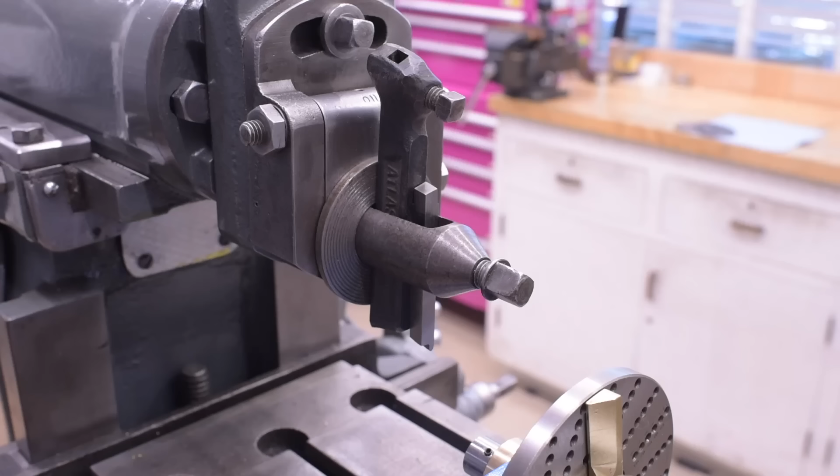You're probably looking at that and thinking, wow, that is the jankiest shaper tool holding setup ever. Excuse me, I'll have you know it was nominated for, but did not win, the 2025 Jankies. Therefore, it is no better than second jankiest in the world. I mean, it did win a 2024 Golden Jank Award, but nobody cares about those.

I've got a tool build for you this week. I'm soon going to be in need of some sort of rotational indexing or dividing fixture for my shaper. I've got a bunch of projects lined up where that would really be helpful, so I'm going to see if I can come up with something right now.

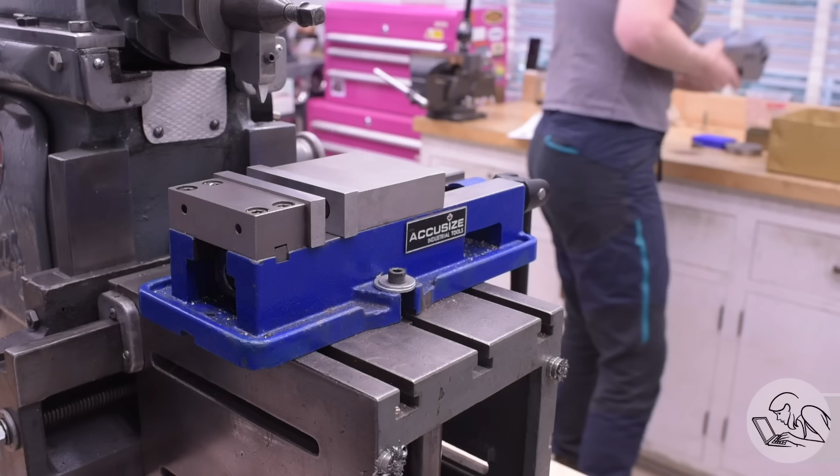I started by trying to find some existing fixture I might have that could be used for rotary indexing on the shaper. I do have my 6-inch Vertex rotary table, but as you can see, it is comically oversized for this machine. To understand my design decisions here, you have to understand how small this shaper actually is. My 4-inch rotary table is a pretty decent fit. However, by the time you get a chuck and everything on there, the entire work envelope is consumed by this setup. So again, not even close to working.

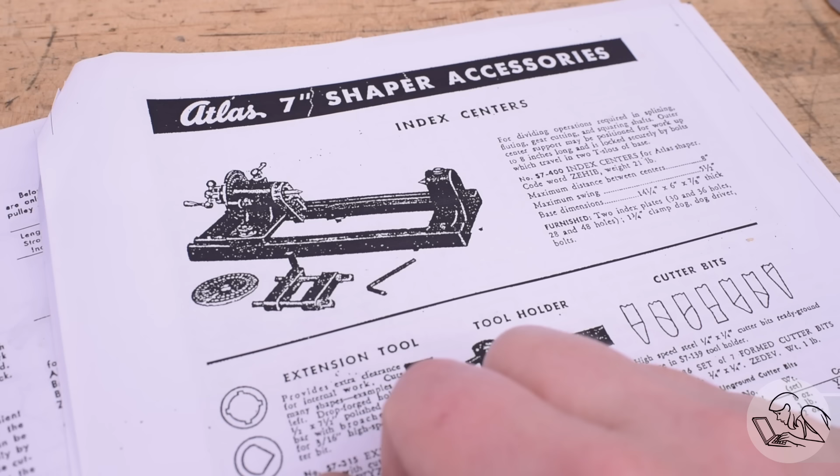Atlas actually did have their own design for this type of thing. It used 2 centers on a common frame, with little indexing plates and a little drive dog clamp thingamajig. It's actually quite a nice design. I did look into acquiring one of these. Unfortunately, not very many were sold, so they are pretty unobtainium nowadays.

I also considered copying this design. It has a lot going for it. Obviously, centers give you guaranteed concentricity on your work. The usual downside to working between centers on something like a mill or a shaper is that you have a separate footstock with one center and your work holding on the other, and you have to get those 2 centers perfectly aligned on the table before you start.

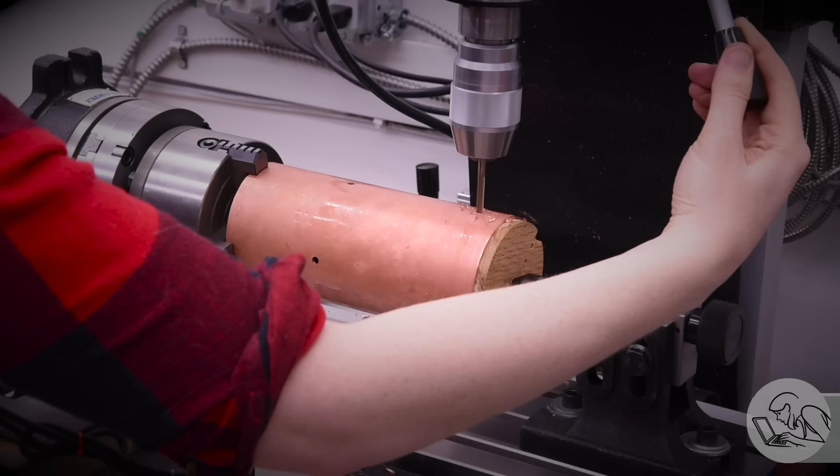You've seen me do this in some setups on my mill for rotary operation, and it's a lot of work. It can take an hour or more to get those 2 centers properly aligned. There's a lot of variables in all 3 dimensions, and every adjustment affects every other adjustment. Now, what's clever about the Atlas design is that they've put both centers in the same fixed casting, so you don't have to align them. You just put that whole casting right on the table, and you're ready to go. And I really like that.

Unfortunately, the challenge for me with this would be manufacture. Those 2 centers in that common casting are quite far apart and not very large in diameter. So really what you'd want to do is line bore that to guarantee alignment of the bores, but because of the small diameter, it's not big enough to do a line boring operation. I don't know how they made these in the factory. My guess is they probably had some sort of specialized machine that bored both ends of it at the same time. I can think of a few possible ways one might make this in a home shop.

But honestly, it's not really necessary. I think I can sidestep this whole thing because I don't need to work between 2 distant centers like this. All of the parts I want to make with this are disc-shaped. I'm talking about gears and ratchet wheels and knurled knobs and that type of thing, so I don't need to work between centers. I just need some sort of shallow work holding system at one end.

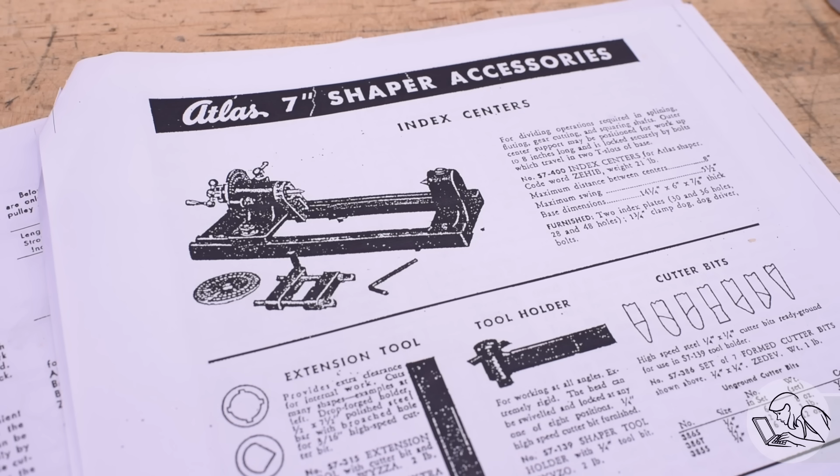The next question is how to do the actual indexing. My Vertex rotary table comes with indexing plates and the sector arms and the little crank handle and so on, all the pieces necessary to index with the rotary table, so this was appealing if I could somehow reuse these parts.

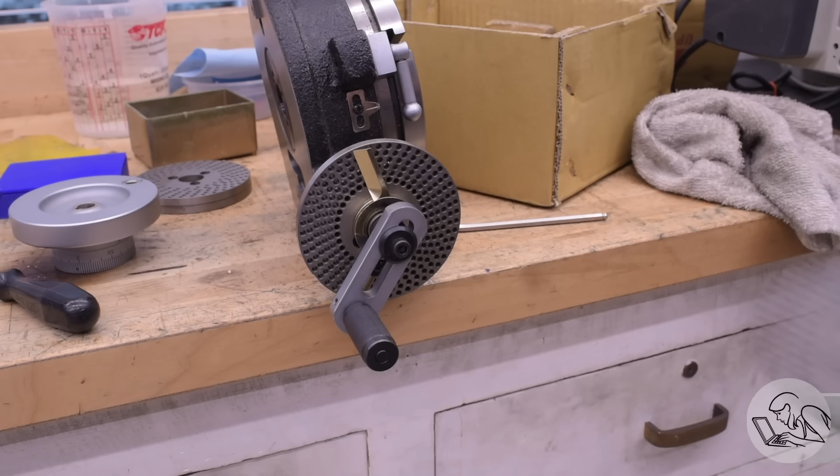The other thing I did consider was using the change gears on my lathe as indexing plates. This is something model engineers have been doing for 100 years. Your lathe came with a whole bunch of gears, so you have a whole bunch of tooth counts and all of the factors and multiples of those tooth counts that can be used for indexing. So a lot of times model engineers will set up an indexing fixture on the back of the spindle of their lathe, something like that, to index with these gears.

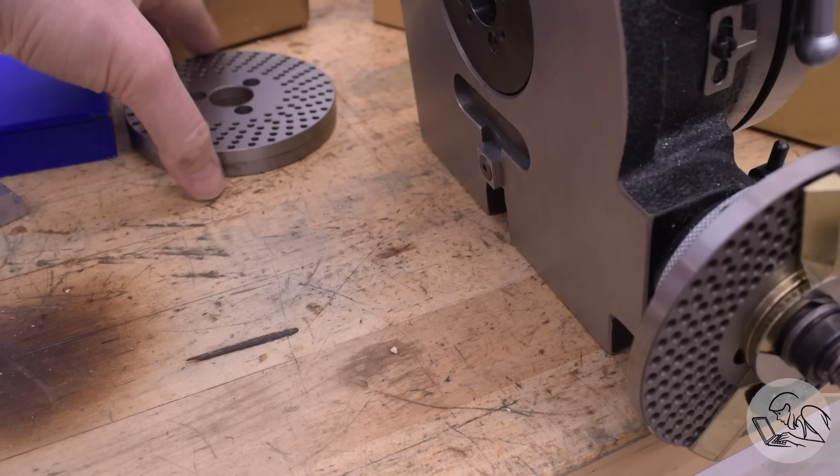Now, the nice thing about indexing plates is they're all the same size. If you use change gears for indexing, well, they vary dramatically in size depending on tooth count, so your indexing fixture has to somehow accommodate that, which adds a lot of complexity.

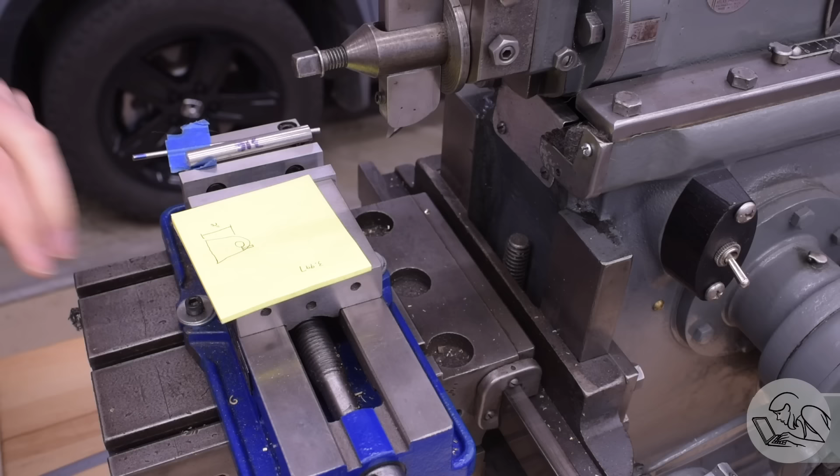The next challenge is whatever I build has to be very compact. It may not be easy to appreciate on video how small this shaper actually is. The work envelope is about the size of two fists, so whatever I build has to fit in that.

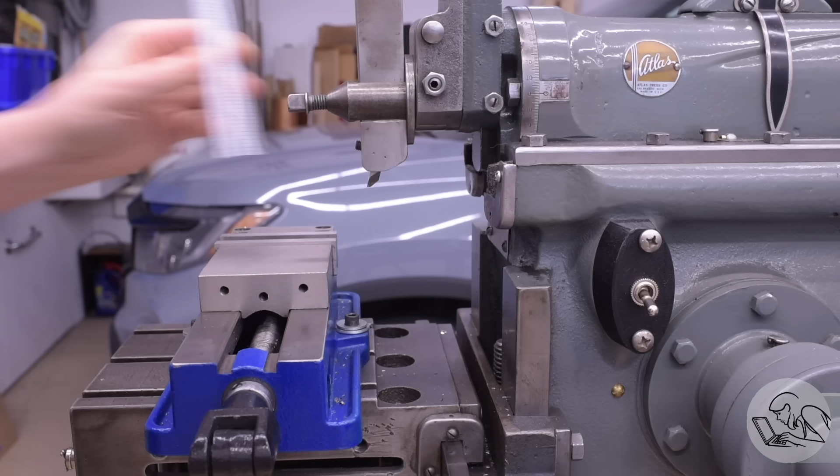I also brought out a couple of samples of the range of mandrels that I would want to work with for work holding. That gives me a sense of how big some of the components need to be. I set the center of the fixture at 2 inches, which is half the Z capacity of the machine, which should give me the most possible working range for different diameters of parts.

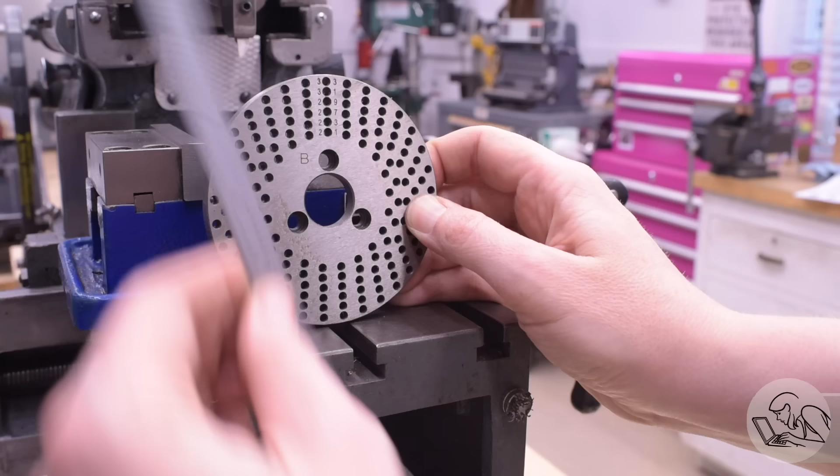And extremely luckily, that is just enough to get these Vertex indexing plates off of the table, so they can fit on a 2-inch center without touching the table, just barely.

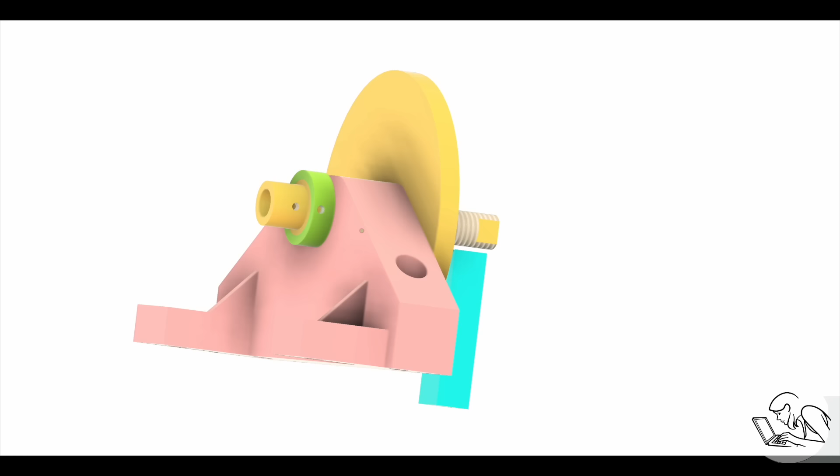I went through a lot of designs for this, and I mean a lot, but this is the one that I landed on. I felt like it solved all of the aforementioned problems with the fewest number of components and each component being as simple as possible, and also fit within the materials I had on hand. All of those constraints together landed me on this design.

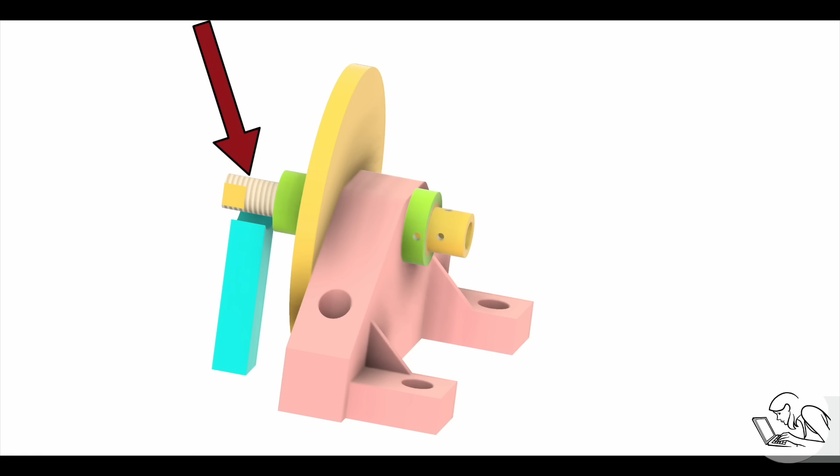So in yellow is the big indexing disc, in green is a bushing that goes all the way through the pink frame, and then in yellow is the main axle, which acts as workholding on the right side with 4 little set screws, and on the left side is a copy of the end of that shaft for the Vertex rotary table so that the accessories for the indexing will all fit onto that.

Workholding was a big challenge to solve as well. I opted to go with a standard collar with 4 set screws to hold it. The idea is you'll turn that standard mandrel size onto every workpiece, which is not a big deal.

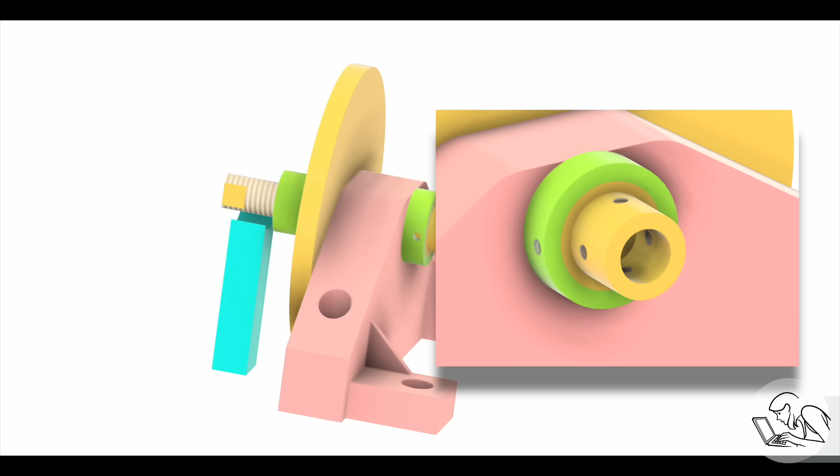Coming up with some sort of flexible workholding system without reinventing the chuck, and also doing it in a very small space, is actually really difficult. So this is what I landed on.

As I'm sure some of you are thinking, why not use an ER collet closer as the workholding? And I did consider that, but even a very small one, such as this ER20, is a lot bigger than you think it is, and this shaper is, again, a lot smaller than you think it is. By the time you get an ER collet closer on the front of the frame and modify it to have the indexing plates and so on the back, well, you've got a lot of stick out, you've lost a lot of work envelope, the rigidity is going to be poor, and, well, it's just a lot of complexity to the design that I don't think is necessary.

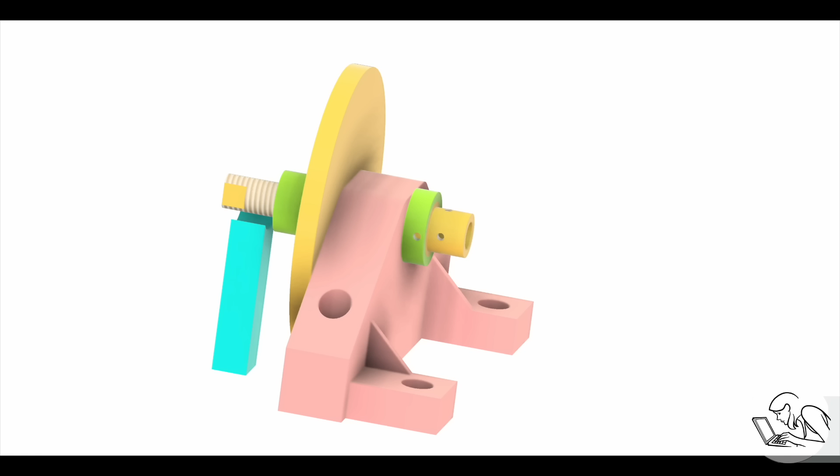If my little collar idea doesn't work, then plan B will be to try a really small collet closer, like a watchmaker's maybe, like an ER8 or an ER16 maybe. Those would be small enough, but I'm going to try this collar thing because it's easy to do, and nice and simple is always best if we can do it.

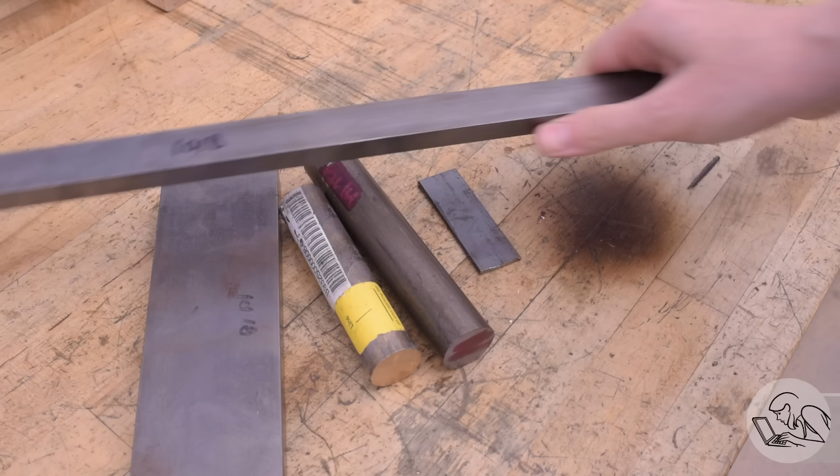I gathered up all the materials to begin with. As I said, I tweaked the design until it fit within all materials that I had on hand. I really didn't want to order anything for this job.

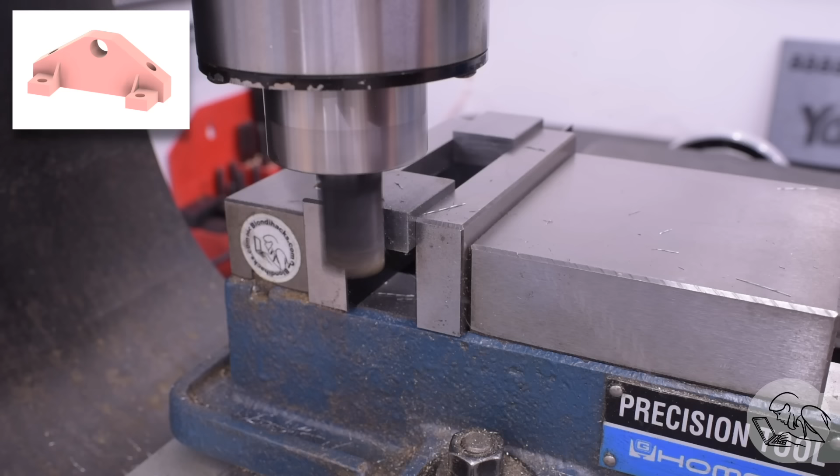I'm going to start with the main frame, which is all solid steel, and because of the complex shape of it, I decided to do this as a weldment. If this was a factory piece, of course, they would make patterns and cast them, but if you only need one and you don't happen to have a cast iron foundry in your workshop, then a weldment is the next best thing. What you do is you make all of the components rough and oversized, weld them all together, let all of the warping happen just like in a casting, and then machine everything to precision after the fact, just like you would with a casting.

I'm going to machine a couple of dimensions first, though, that aren't going to matter if they move a little bit, and that's the ends of the main frame and the ends of the feet.

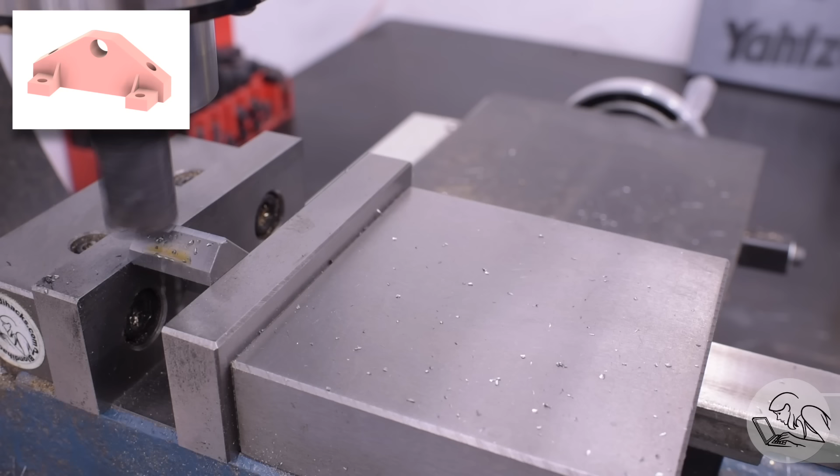This is going to ensure I can get square welds and so on. Speaking of welds, I'm going to do a very generous weld prep on the feet to make sure I've got plenty of weld penetration. I'm going to bevel all 4 corners that are going to get welded all the way around. Next, I want to cut the corners off of that square block to create the overall shape of the part you see in the corner.

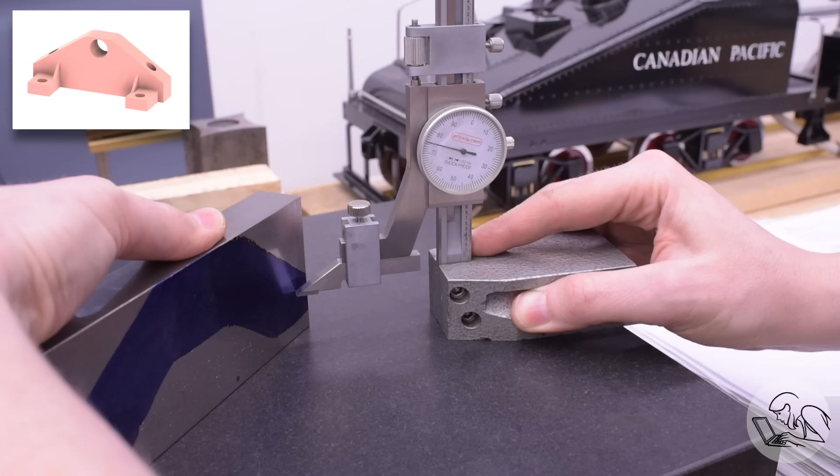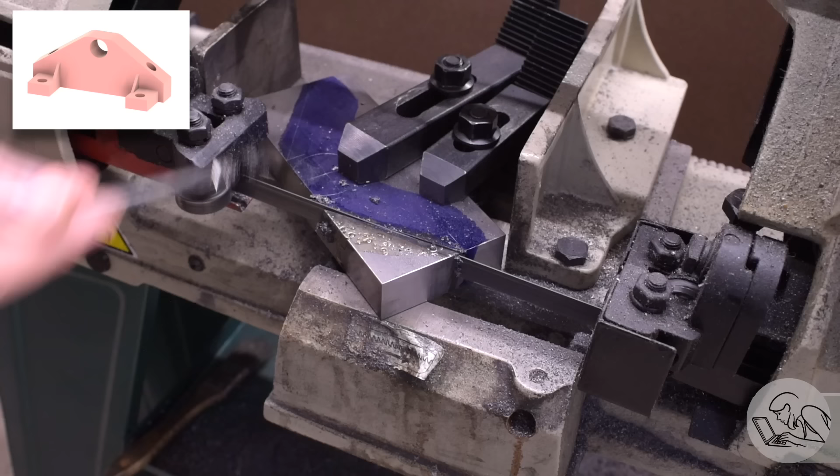I need to do this now because once the piece is welded into the complex shape, it's going to be really difficult to put it into any kind of machine. I really only have one machine practical for making these heavy cuts in this steel, my horizontal bandsaw. So I've roughly laid out where those edges need to be based on the bolt circle at the top and the feet, which gives me enough information to do some rough bandsaw cuts that are oversized, which I can later machine down. If I don't make these cuts now, I'm never going to be able to, and there's no other practical way in my shop to remove that much steel.

Machining all that away would take hours and probably consume multiple cutters, but by bandsaw cutting them off, I've got these little wedges that'll go in the scrap bin, and I'll use them for something someday.

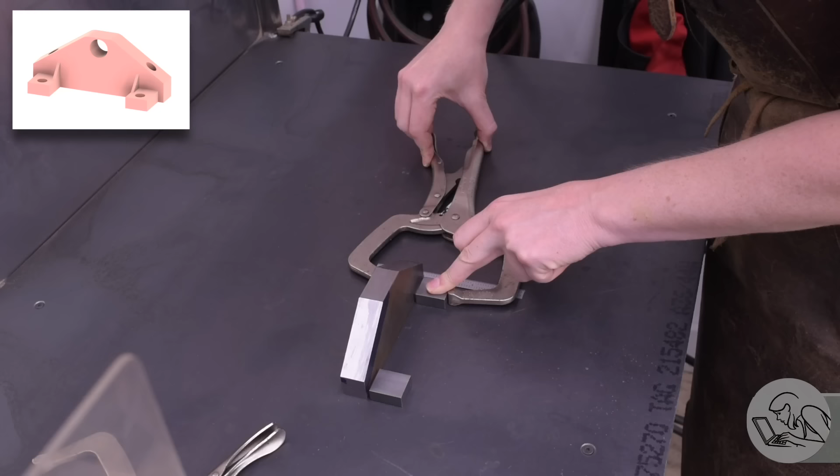Now I'm ready to weld the feet on. Again, this is all still at the low precision stage, so if everything warps and shifts from the welding, it doesn't matter. But I'll tack those in place, and then once they're tacked all the way around, I will weld everything up fully.

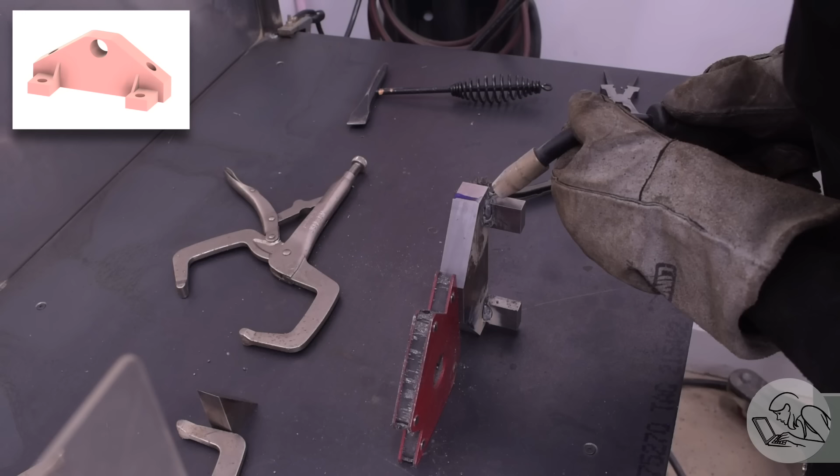I'm using flux core MIG for this, which is not the correct welding process for a job like this, but it's the process I have, so it's the one I'm using. The welds are going to be ugly, and yes, I should have used TIG. If I had that set up and the skills to do it, I would have. I know all the things, but this is going to work, so stick with me and the welds will get cleaned up. It's all going to be okay.

I promise. Flux core MIG doesn't get a lot of respect in the YouTube welding world, it seems. All the cool kids TIG everything, but honestly, if like me you weld one thing a year, flux core MIG is awesome because it can do most jobs adequately, and you don't need the big gas tanks and dealing with all of that. Your whole welding setup takes up 1 cubic foot in the corner of your shop, and it's there when you need it.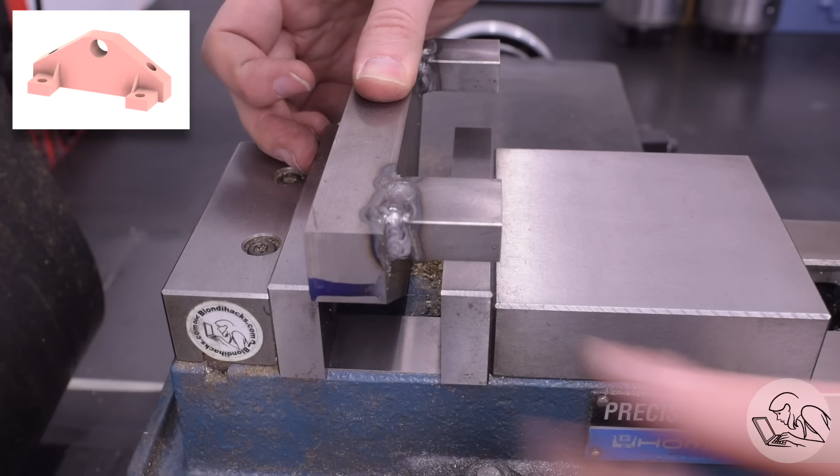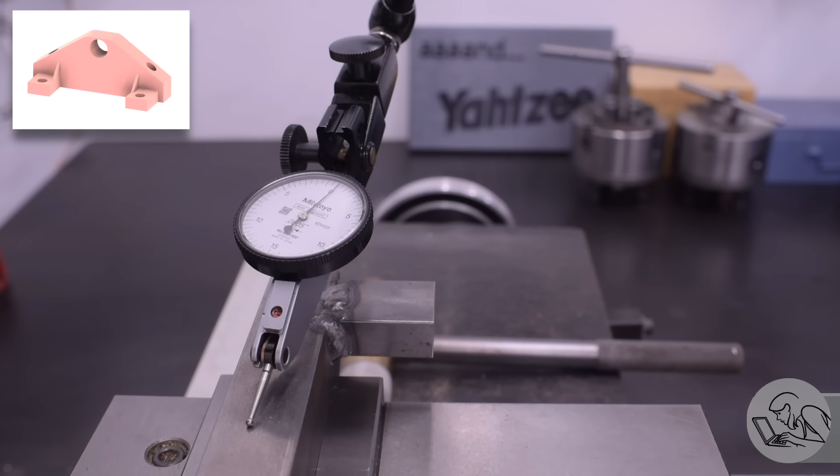Once that's cooled down, I can set it up in the mill to machine the bottom flat. That's going to be my first reference surface. Again, I'm machining this just like I would a casting. I'll start by tapping in the top edge of that bar as flat as I can get it. Now this is not a machined surface, so you may not be able to get this perfect, but the goal is minimal material removal. So I get it as flat as I can, then take light cuts from here to machine it flat and take off as little material as possible, cleaning up those welds and the cold rolled surface.

This seemed to be going well, but somewhere around here is when I realized I had missed something. More on that in a second. You can see that was going well before I aborted.

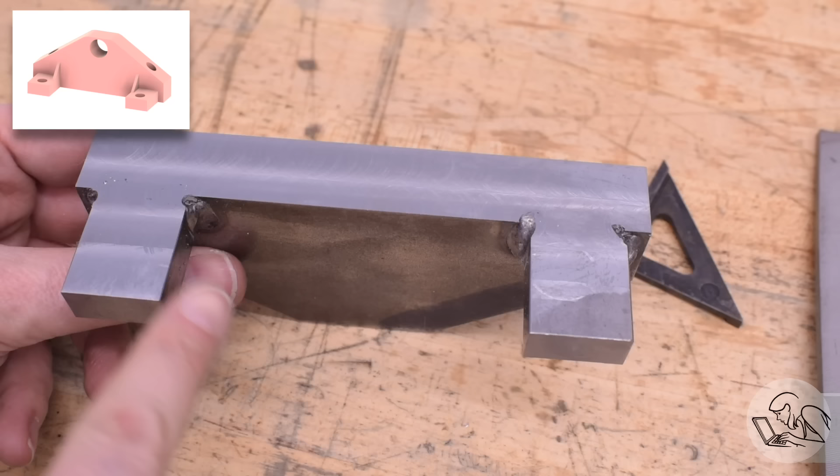A little bit of porosity in one weld and a little bit of undercut in some of the others. I'm not a very good welder, but it was going fine. A little bit of a low spot on this foot still because I aborted, as I said. The reason is I forgot to weld the gussets on top.

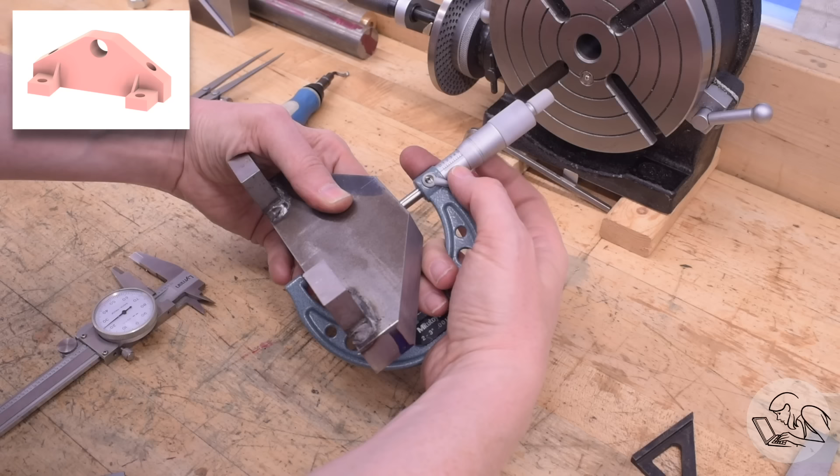So, yeah, you have to do all of the welding before you start machining or else everything's going to move again. Luckily though, I took some measurements and I actually still have 20 thousandths to remove. So if I'm careful, I can go back and weld these little gussets that I just made in place and remachine everything, and I may just get away with it.

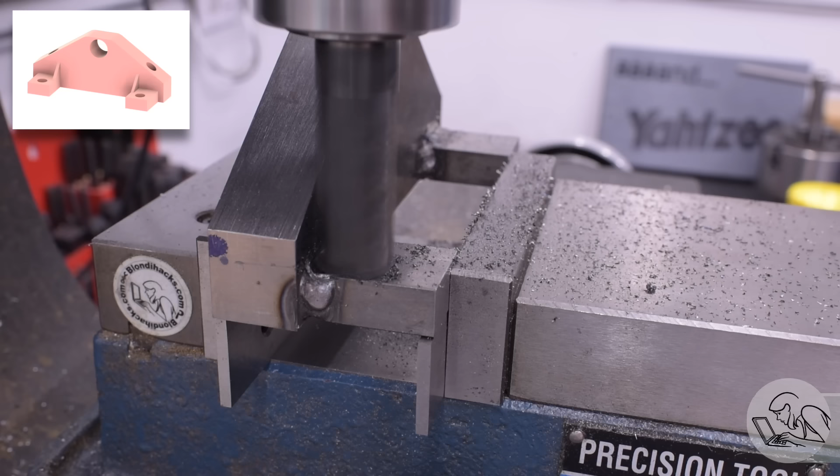That's not going to stay there on its own, so I'm going to have to weld it in, which means I've got to machine these welds out of here so the gussets can sit flat. This end mill I'm using is a bit of an unusual beast—it has chamfered corners, so it's actually creating chamfers on the insides. It's got pretty high tool pressure because of that, but in just a couple of passes it's removing the weld and leaving me a nice little chamfer in there for strength.

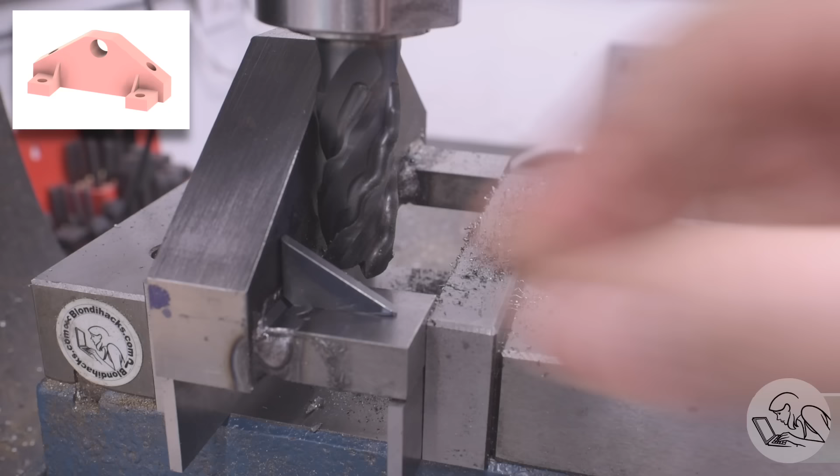I also knocked the corners off my gussets so I can sit them in there and weld them in place. To try and weld these in with minimal heat so nothing moves very much, I'm doing the old stack attack—rather than welding a bead in there, I'm just stacking tacks one after the other. Again, sorry, I'm not a good welder. It's not very pretty, but let's see how I actually did on the heat management, which is all that matters.

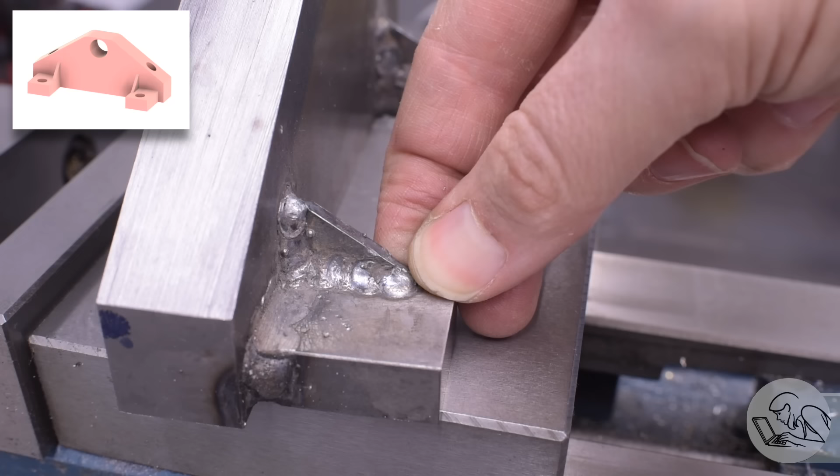And I landed right on the correct overall dimension, and I'm pleased to say a quick check on the surface plate shows this thing is dead nuts flat—at least as flat as I can make things in my shop without a surface grinder. Very pleased with that. I almost didn't bother with those gussets after I realized my mistake, but I thought they're probably important for rigidity, and yeah, I think it was worth going back and fixing that mistake because the whole system will be a lot more rigid with those in there.

The next thing I did was the countersunk bolt holes. These are going to be useful for fixturing, so I want to do these now.

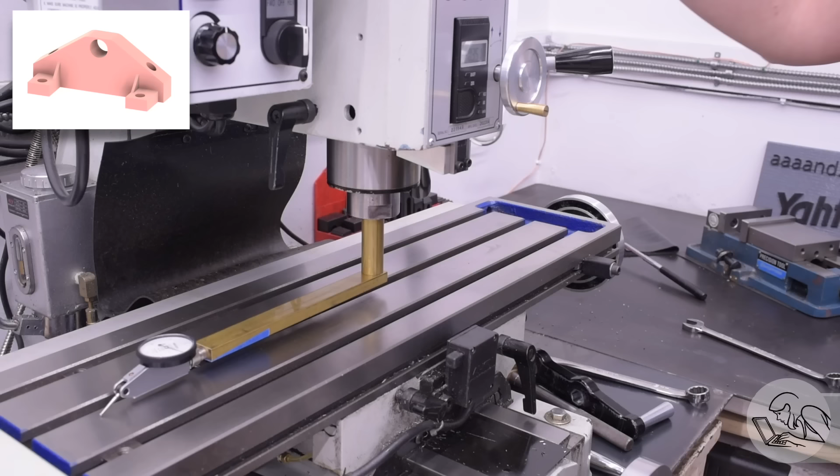Oh, she's checking tram. That can only mean one thing: the fly cutter is coming out.

I don't check the tram on my mill all that often, honestly, because here's a dirty little secret that enthusiastic new machinists seem often unaware of: tram is not nearly as important as you think it is. In a hobby environment where you're mostly using small diameter cutters, tram has very little effect on anything. The overall flatness of a surface is the average of the high spots of that surface, and as long as the diameter of your cutter is smaller than the surfaces you're cutting and is small itself—say half an inch or less, as is typical in a hobby shop—then tram is having very little effect on your work. However, once you get out something like a fly cutter or a large diameter face mill, then tram matters a lot, because you don't want to start creating water slides on the top of your part.

Next, I'm going to bring in an angle plate. This is going to hold my work because I'm going to do all of the critical relational surfaces on this frame all in one setup.

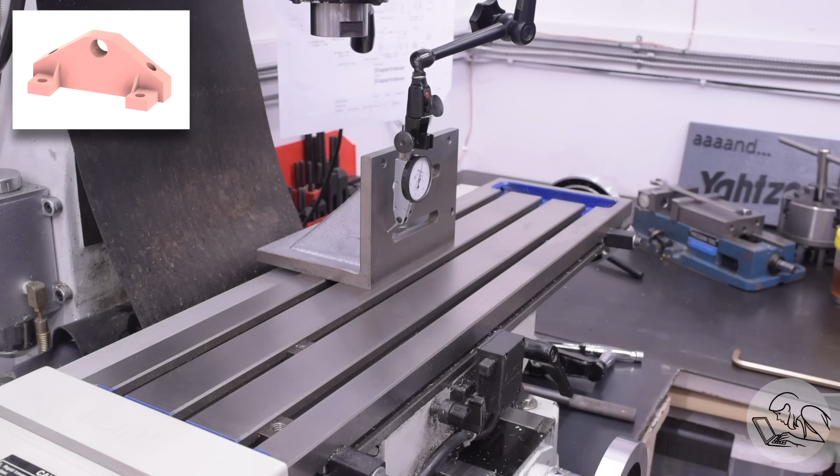I of course align it along the x-axis of the machine, and I also check it for verticality, because my experience with this cheapo angle plate is that it's not really usually 90 degrees, and I often have to shim it to get it to zero out vertically. Now, I guess 89.5 degrees is an angle, so it's not false advertising that they call it an angle plate. Amazingly though, this time it measured square, so I'm not going to look a gift 90 in the mouth.

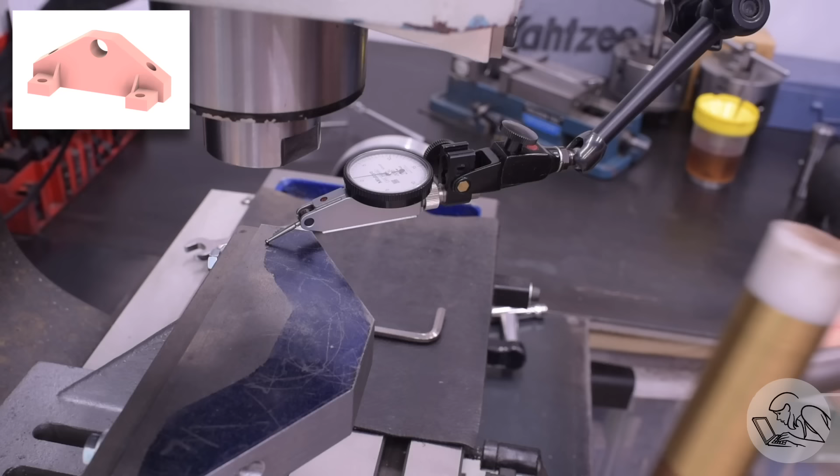I'll bolt the frame on there now, and once again dial this in as flat as the factory cold rolled surface will let me, so I can get minimal material removal and end up with a flat surface. The goal is to create a surface that's as perfectly square to that machined bottom as I can get, and that's why I'm doing it in this angle plate setup.

For support, I'm adding a machinist jack. I've got the indicator on there to make sure I don't jack this thing up out of flat—that's easy to do with those jacks. Then I clamp the other feet in place for a little extra support, and in comes the fly cutter.

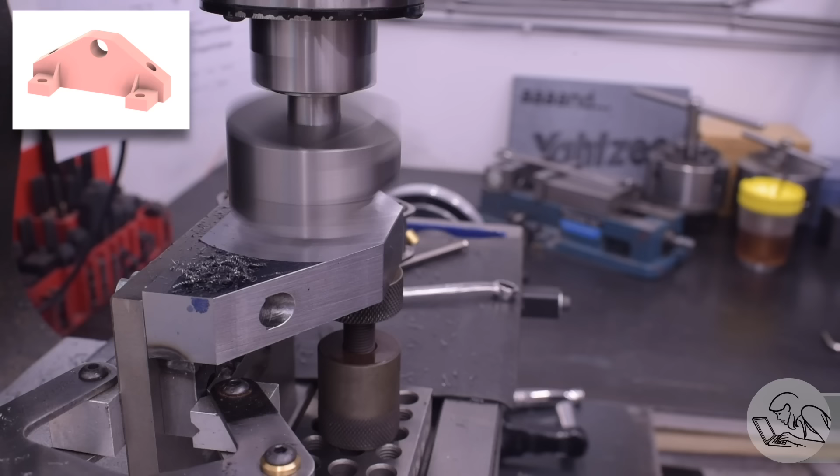I'm taking a very, very light cut here. The goal is not to hit any kind of dimension—the goal is just to clean up that factory cold rolled surface and get something as flat and smooth as I can. So the best way to do that with a fly cutter is very, very light cuts. I think this is a 2 thou pass that I'm doing, just enough to clean it up, and a very low feed rate.

That went well, I'm reasonably happy with that. This is 1018 steel, which doesn't fly cut all that well, but it's okay.

Now, while in this same setup, without touching anything, I'm going to do the main bore that holds the axle. It's really important to do this in the same setup because then it's going to be guaranteed parallel to the bottom of the frame and square to the top surface, or what's going to be the front surface of the frame. Any error in all these relationships is going to be telegraphed into every part I make with this thing, so it's important to get this right.

I pre-drilled that, and then I'm going to come in with the boring head to make sure I get a very round hole that's right on dimension.

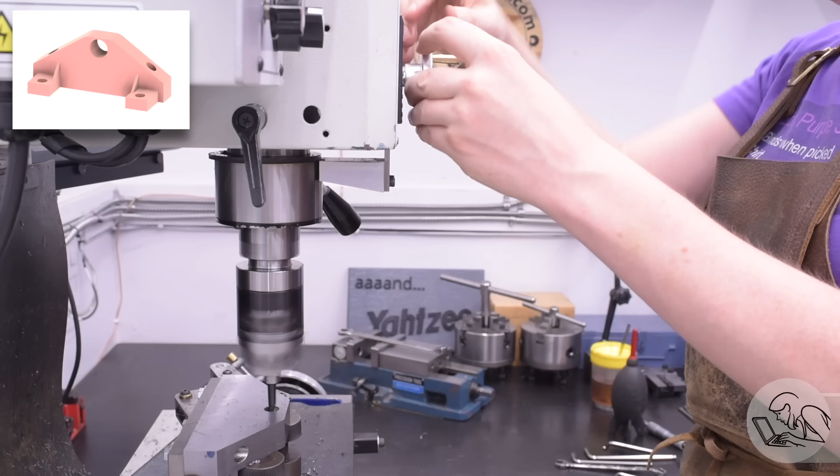Regular viewers will know the boring head is probably my least favorite milling job, but I will say that this little hand wheel I added to the quill recently really helps. It makes it much more pleasant to do these long, slow boring head cuts through thick material like this, especially when you're doing a lot of passes. And then you can quickly retract it with the little handle. This has reduced the annoyance of boring heads on a machine like this by probably 50%.

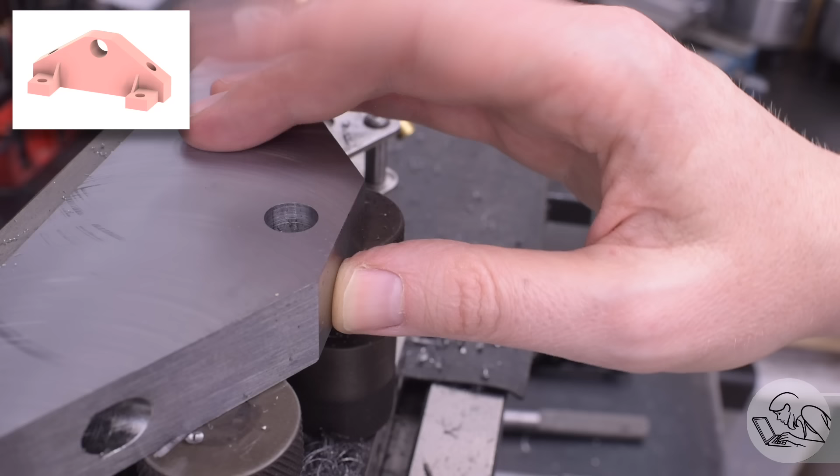I hit my dimension on that bore, but something didn't seem right. I had a little moment here where I'm like, wait, how can it be that the axle is 12 millimeters, it goes through this, and then the bushing goes around the axle and also goes through this 12 millimeter? Oh no. Yeah, so the thing about CAD is that it's very easy to accidentally design things that intersect without you realizing it, and that is what happened here.

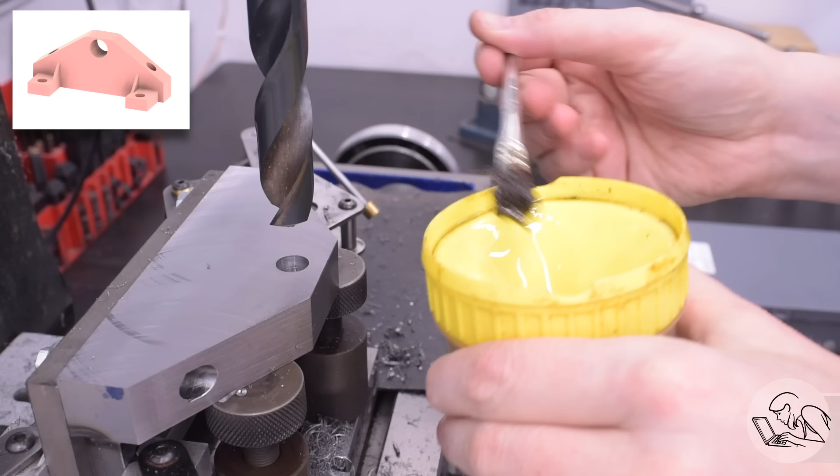I caught a stroke of luck here, though. I went back to the model and increased this bore to the OD of the bushing and not the axle, and there's just enough room in the frame for me to get away with this. The web at the top of the frame is going to get a little thinner than I'd like, but that material up there isn't really doing anything anyway. It's got plenty of support all the way around, so that bore I just did became the world's fanciest pilot hole for a great big drill, and now I can come in once again with the boring head and bring this out to the actual correct final dimension.

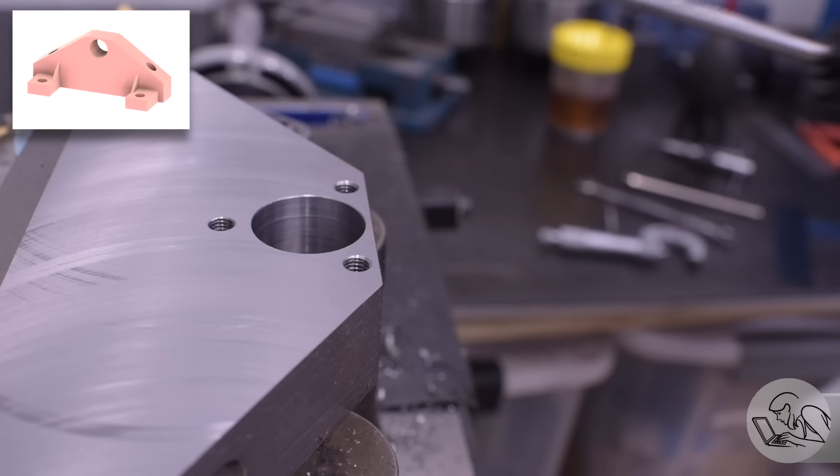The axle is 12 millimeters in diameter, and the outer bushing that holds it is 21 millimeters. These are all metric, of course, because again, I'm matching the parts on the Vertex rotary table, which is built-in metric. For that same reason, next comes a 32 millimeter bolt circle to match the bolt circle that's in the indexing plates. Those plates will bolt directly to the frame, so they'll be nice and square to the work because they're clamping against this frame surface that I know is square to the base.

I'll do a quick check, make sure that these actually fit on there and that the center bores align and so on, and that's all looking really good. You can see as calculated, the plate just clears the bottom of that frame. That is very lucky. Well, I mean, I did plan it, but still, it was lucky that it worked out this way for my shaper.

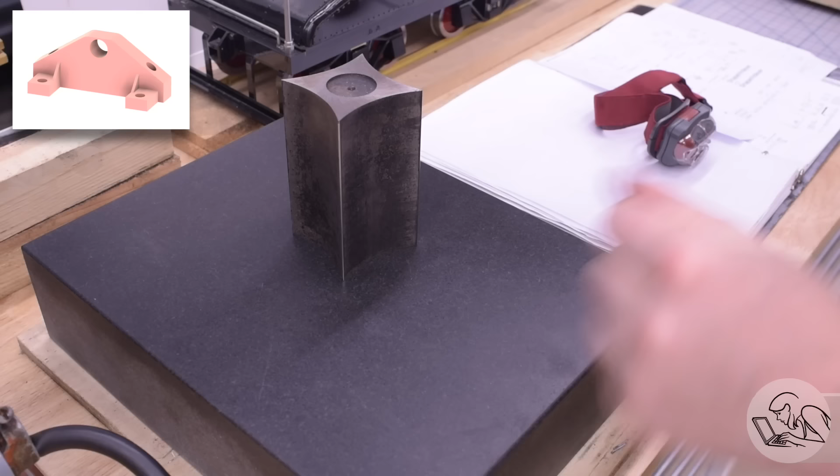Now, I don't have a really good way to check squareness, no fancy squareness comparator or anything like that. I do have a square standard that I can put up against it on my surface plate and shine a light through there. According to this method, it's as square as I think something can be. There's no light coming through there other than a few specks where the surface finish from the fly cutter isn't perfect. I did the same check with my Starrett square, which I trust, and same story, no light coming through except imperfections in the surface finish. So very happy with that.

I'm going to pause here and go on to the next part, even though there's a lot of finishing work left to do on the frame, because I want to know this whole thing is actually going to work before I put in the effort to make it all look nice.

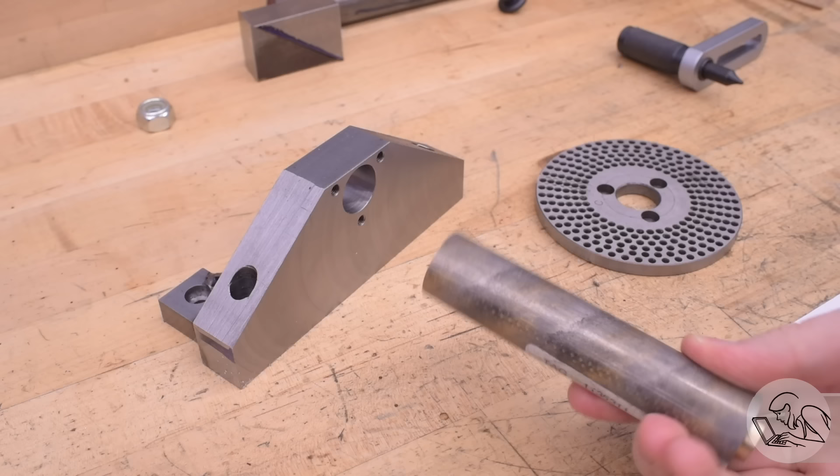The next piece I'm going to make is the main bushing that goes through this bore, and I've got this really nice piece of bronze for the job. Just need to make that go in there. It doesn't fit. Well, I've heard so much about this whole machining thing, I guess I'll give that a try.

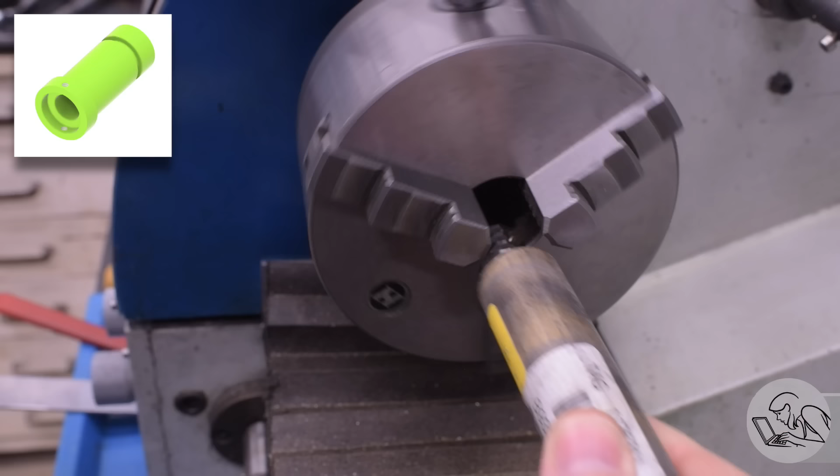I have this lathe machine on my bench, and I read the instructions for that. I think I got the gist of it. I'm going to face off the front of that, as is tradition. Then I'm going to pull that out and put a center in it, because all of the features on this part need to be made in a single setup. That's really important so that everything's concentric with everything else.

You can get extremely accurate and concentric parts on a cheap 3-jaw chuck like this, as long as you meet a series of conditions. You have to do absolutely everything in a single setup. You cannot touch that chuck at all once the material is in it. And you have to cut every single surface on that part in this setup. And the shallowest cut on your part has to be greater than the runout in your cheap chuck.

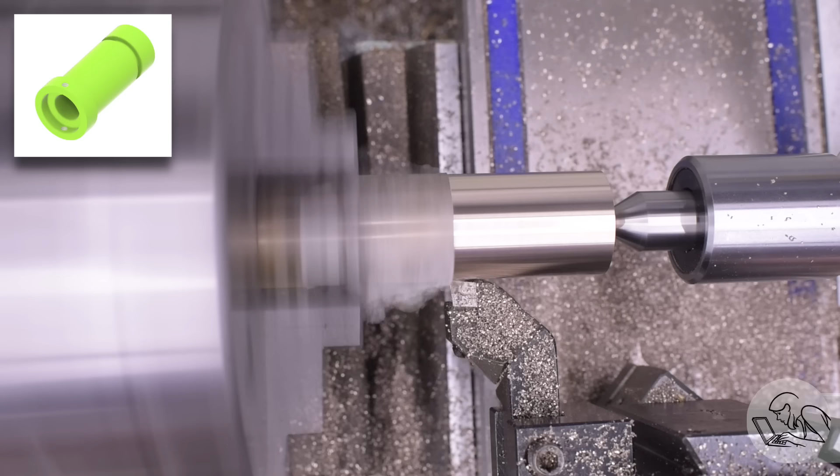If you do all of those things, this part will be as accurate as the spindle bearings in your lathe, which even on pretty budget-friendly lathes is going to be excellent. Because of that, model engineers will jump through a lot of hoops to make a part in a single setup to squeeze the accuracy out of their inexpensive lathes.

After the largest OD is turned, I'm going to create the flange at the far end of the part, and I'm going to establish this shoulder with a grooving tool. This has to be done flange outward because we're going to have to be boring, which again means we have to do it facing outward so we can do it all in one setup.

This would be a good opportunity to use a left-hand turning tool to turn up to that shoulder, but I couldn't find my left-hand turning tool for brass and bronze, so I instead established that shoulder with the grooving tool, and then I'll use my right-hand tool. Then while that cut was running, I looked at the back of my tool holder and realized my left-hand turning tool is on the other end of this same tool bit. So I stopped, flipped it around, and switched to left-hand turning, which is a much better way to get this diameter and get the back of that shoulder accurate at the same time.

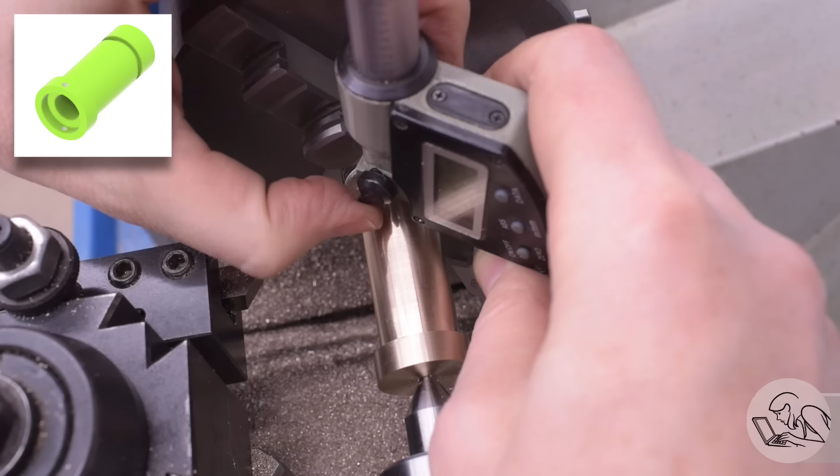Here's a dirty little secret for you. I actually missed the dimension on the boring head operation a little bit, so I left the bushing a bit oversized, so I still have a good fit there. Then on the far end where the vertex indexing stuff's going to attach, I turned that down to the correct 21 millimeters that it's expecting. That's why you always do internal diameters first, because it's very easy to match outer diameters to internal ones if you blow the dimension.

Survey says, close enough. Now I come back in and do an undercut under that shoulder, and this is important because I want to guarantee that shoulder is sitting firmly against the frame. This flange at the end of the bushing is a thrust surface that's going to transfer the substantial forces of the shaper through the part and into the frame, so that this bushing and the axle aren't trying to take those forces. And there's a little groove at the end that takes a little spring clip that's part of the vertex indexing system. Then, of course, chamfers are what separate us from the animals, so let's go break all those edges.

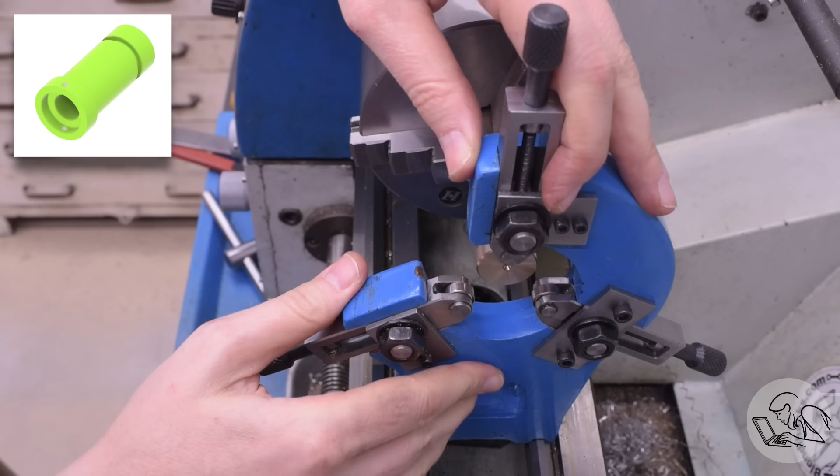Now it's time to do the internal features, but again, got to do all this in one setup. So out comes the tailstock, and in comes the steady rest, and I'll very carefully touch these rollers into place without moving or deflecting the part at all. This will allow me to do all the internal features and maintain concentricity, even with a cheapo chuck.

The stick out on this part is not terrible. It was sort of borderline. I might have gotten away with not using the steady rest in this case. I'm going to be doing pretty light cuts, not a lot of lateral forces, but figured better safe than sorry.

So I went up a couple of drill sizes, working up towards that 12 millimeter diameter for the main axle. Now I'm going to want to bore this for concentricity, but I can't bore something that deep. My smallest boring bar that will fit in that hole doesn't have the reach needed. But I do have a 12 millimeter reamer.

So I'm going to use a little trick that's worked for me well in the past. I'm going to bore as deep as I can with a small boring bar to create a concentric bore that's a little bit smaller than 12 millimeters. That's going to act as a pilot bore for the reamer. Reamers, of course, can't create concentricity, but if you start them in a very concentric hole, they will stay in that track.

They will create concentricity from there down. So the bottom end of this hole is still the pilot drill size, the rough drill size, which is not round or concentric, but the outer part is a concentric bore, slightly smaller than the reamer. So the reamer cuts this outer part to dimension. Then when it gets into the drilled portion at the bottom, it continues going straight and dimensions everything accurately.

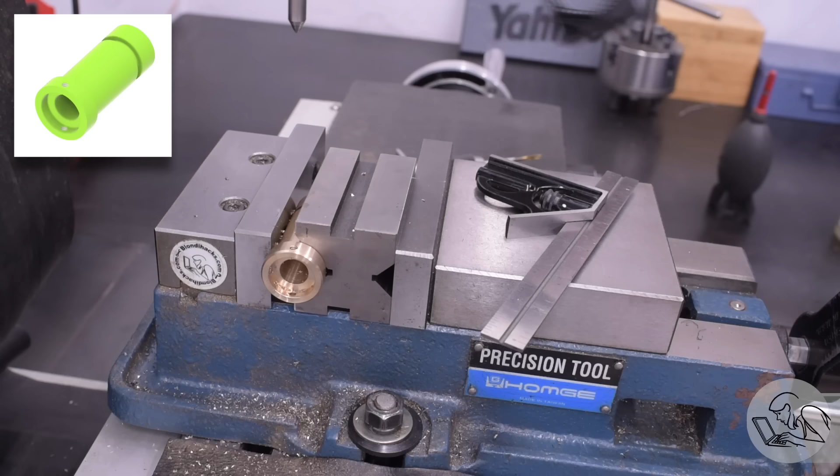I was able to drill those 2 opposite holes straight through, but I can't tap them straight through. My tap isn't long enough, so I need a way to index this. I don't have a collet this size, so I wasn't able to index with a collet block. So instead I'll bring in the rosette index, set that on the part, use that to index 180 degrees so that I can get the tap lined up for the other hole.

These holes are going to hold brass-tipped set screws so they can clamp down hard on the spindle that's riding inside this collar without marring it up.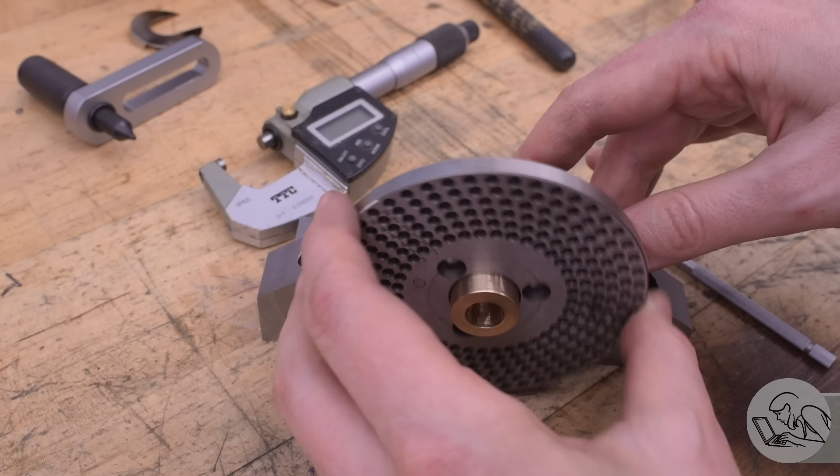That's the main bushing done. Let's do a little test fit of all of the accoutrements from the Vertex rotary table. Make sure it all fits. So the index plate will go on there. The hole's all lined up. It's a good thing. Then the sector arms go on there.

And then there's this kind of slightly goofy spring clip thing that the Vertex uses to hold the sector arms and put some preload on them. And then you can clamp down with this little screw to hold the angle of the arms relative to each other. And that's all looking good.

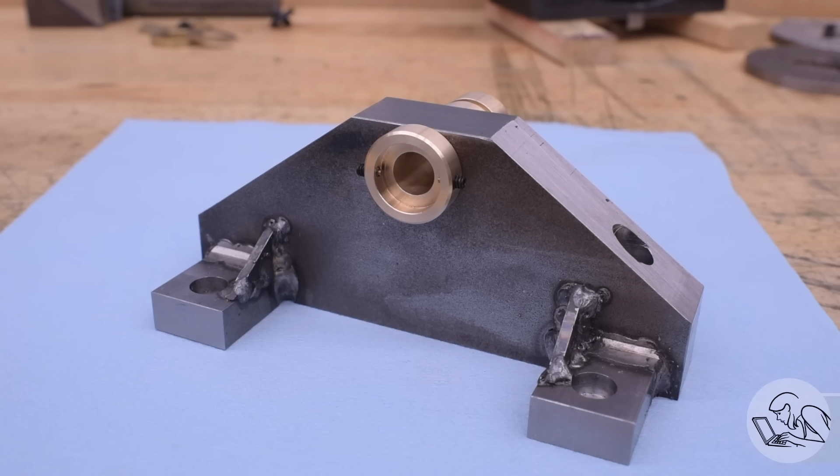And then the axle will go through that and the crank arm attaches to the end of the axle. This is an awesome start.

So far everything is going to plan, touch wood, but we have a lot more to do yet, and I am out of time for this week.